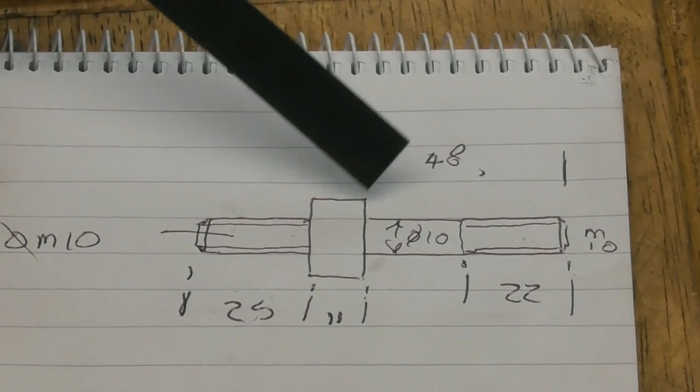As I mentioned at the end of part 2, the next procedure is going to be to make up the spindle that holds the tool post down onto the riser block. I'll show you a little drawing of that and we'll go from there. So yeah, unusually I've done a little sketch. It's basically M10 on either side with a boss in the middle.

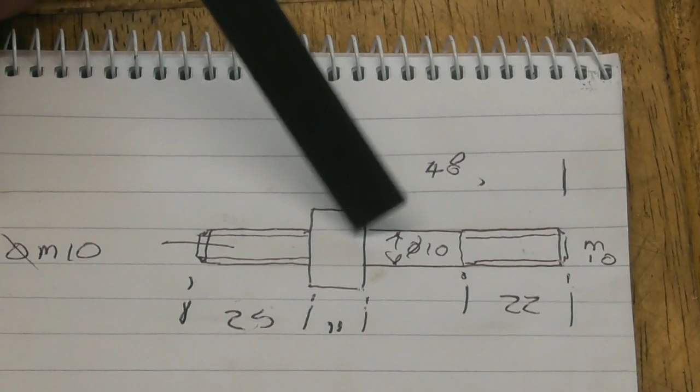So we've got 25mm of M10, a boss here which is just around the 18mm mark. We'll come to measure that up with the mic, which is 11mm thick, and then a 48mm long portion of M10 again, and the thread only needs to come down about 22mm. I'll probably just buzz through showing the highlights of machining that, and we'll go from there.

At the end of the last video I was shown tapping a hole in the riser block, and my vise was loose, but as you can see I've tightened up the 2 bolts that hold the vise on the bench. I was slapped on the wrist for it, and quite rightly so, and now my vise is tight.

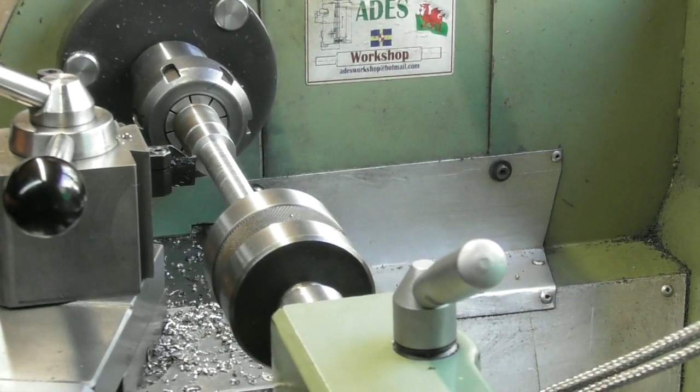Now I don't want to turn it down over its entire length, so what I'll do is just touch my parting tool on the edge of that face, which I've just done a skim on, by the way. Set to 0, and the overall length of this side is going to be 48mm. So I'll just set to 48. Let's just lock that into position. There we are, 48mm.

Lock my carriage, and I'm going to put a groove. Let me just check, you can see where I am. I'm going to put a groove in here. Well, I know there's 1.5mm to come off here. If I do a groove a mil deep, then I know I'm going to be undersized. I will be parting this off. I've got a couple of mil deep there.

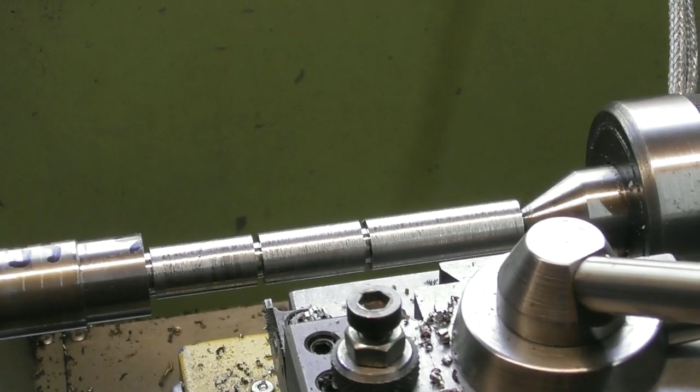So I've just put a couple of grooves in with a parting tool. I set the parting tool up against this face, came out 48 and put a deep groove in there, and that's the overall length of the M10 with the plain diameter - the M10 threaded bit is here, and the 10mm plain diameter is there. And I put a secondary groove in, which is to the root of the M10 thread, to that depth.

So now I'm just going to skim across the top of these 2 journals, should we call them, until I've got a 10mm diameter. Then I'll probably part this end off completely, and I will run the die up to put an M10 thread on the end.

Then I can hold it in a 10mm collet, and I can turn the other end, all based on a nice large diameter in the 10mm collet, or a large length of that diameter of 10mm.

I think my tip is a little blunt. The finish is okay, I'm just going to skim this down. I'm taking a mil off now. It leaves 0.5 mil, and I'm going to change to my finer tips. So I'll just skim this off, maybe a bit faster on the speed.

That's better. I've got a bit of deflection in this shaft, hence why I'm going to change over to my aluminium type tips.

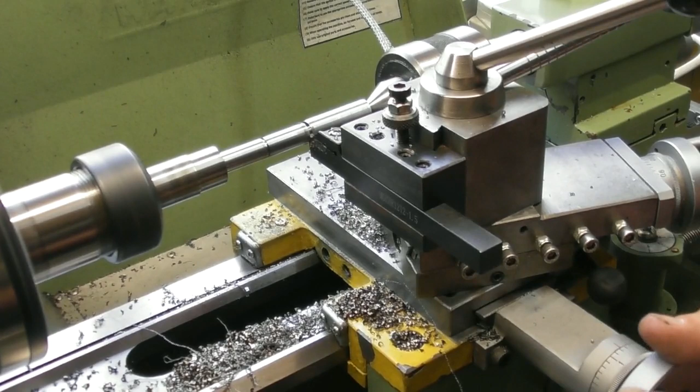So 10mm diameter done. I'm just going to part this end off. I'm not going to go all the way through. I can go a touch more, I believe.

Don't want to part this right off, because as you can see I've got a centre in. I don't like parting things off with a centre in them. But...

There we go. Just snapped off the little pip in the centre. That was as brave as I wanted to get. So I just remove that pip.

So I've got no support on the end now, but I should be able to just, there we go, remove the pip. I think at this point I'm going to put a centre drilled hole in the end, not too big, just a small one, so that I can pick that back up should I need to.

That will do the job. I think we'll have a nice chamfer on the end of there. I'll swap over to... there we go, to one of these.

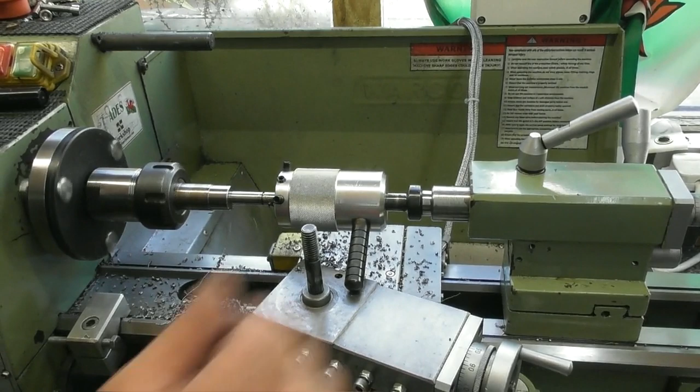I'm having to use a spanner instead of my drawbar. Not instead of my drawbar, instead of my winding handle. Purely because there's a drawbar in the headstock, and I can't put my winding handle in while the drawbar's there.

I push my emergency stop because with a spanner on the end of the head, if I were to start it up and not take the spanner off, well, you can imagine, flying spanners. Big dent in the forehead. So yes, I've got into the habit whenever I've got a spanner or the winding handle.

We're nearly there now. I need about another one turn to get into that groove.

And I believe that's it. So that's it. Take the spanner off. That's a 10mm thread with a 10mm diameter here, which fits snugly in the tool post.

I'll try the tool post on there in a moment. And I can now hold it by that 10mm, turn it round, and machine the other end.

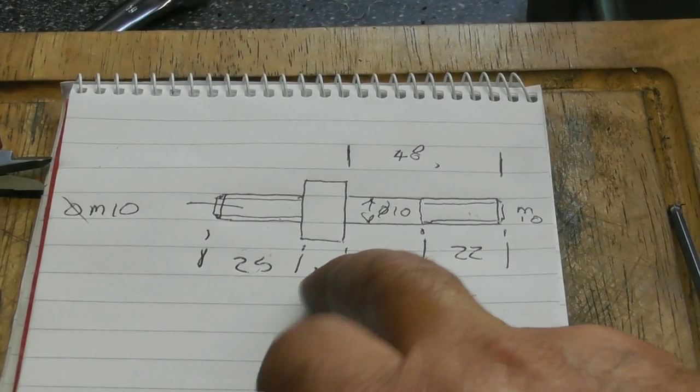So I'm just referring back to my drawing, 25mm, 36. So I'm going to part it off from that front face. So I've machined all this lot here. I'm going to part it off 36.5mm.

I can just get in there with my parting tool to take it off this larger diameter. I'm going to part it off, and I know that it's 0.5 millimeter to take off the end. Right. Oh well.

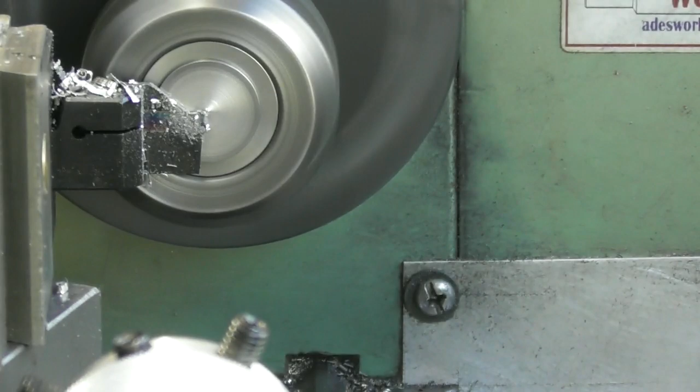Off it comes. So yeah, I finished off the diameter. Let me just have a double check of that.

Well, that's 10mm on the button. I don't know how well that picks up. Yeah, that's 10mm. Undercut it in there with a parting tool. Finish facing this face here, and put a chamfer on the end as a lead-in for the die.

So the next step in the procedure, much the same as last time, is to run the die down there, much the same as you saw me do last time.

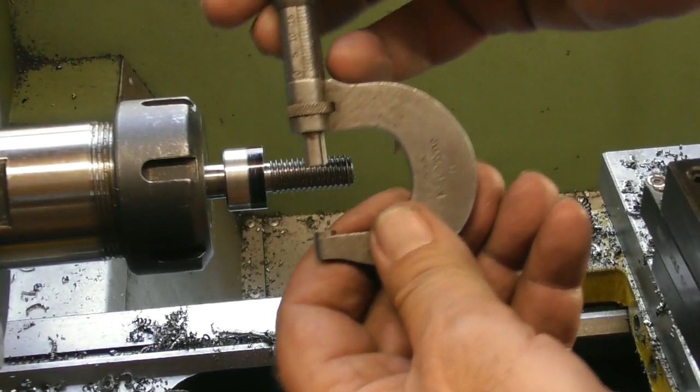So this part fits in my riser block, and the hole I bored in the riser block earlier, I've just checked it, it measures up at 18.1 millimeters. So to give myself a fighting chance, that black area is like a hundredth under 18.1. Now I've screwed the riser block on there, and it does just fit in here. In fact, it will remove the black marker if I do it.

Now I've measured the underside of the tool post, and that measures 17.95 - sorry, I didn't say - and that is a couple of hundredths under, because it has to come on and off occasionally. So a couple of hundredths under where it fits in the tool post, and like a hundredth, maybe 2 hundredths under where it fits in the riser block.

So I'm going to put a chamfer on there now, on this leading edge, to make it easy to get in the riser block. And I'm just going to get in with a cutter and put a larger chamfer on this back edge, to allow the lead-in for the tool post on the riser block. So I'll get on and do that.

So in fact I can probably do that in shot. One clip. Oh, I got my tripod very close here. In fact, yeah, I think that'll about do me.

Let's just put a little chamfer on there. I'm just going to angle my tool post round a bit. I'm working around the camera here. I think I can just get in there. I can. And a larger one here. And that will do me.

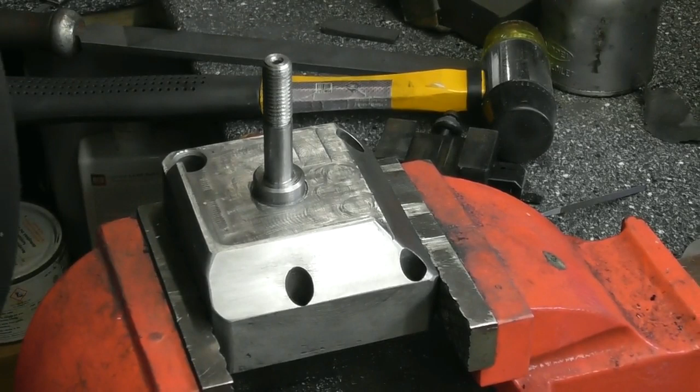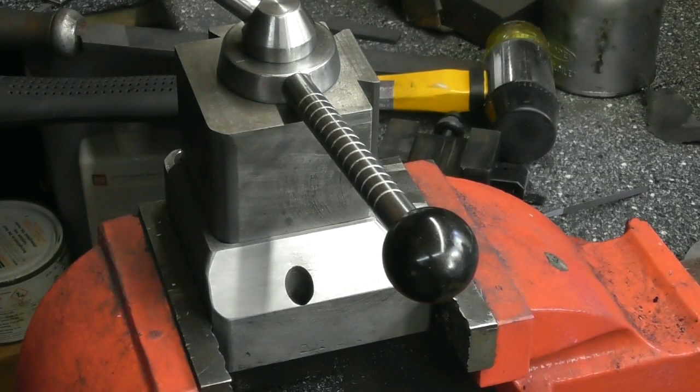Let's just try the handle in there. Now this is in the orientation it would be on the lathe, so the carriage runs in this direction. I'm about 90 degrees out with the handle. Now I can't bring it back there, but what I can do is bring it round another 3/4 of a turn, which is 3/4 of the pitch of the thread.

So the pitch being 1.5, 75% of 1.5 is 1.125. So of the underside of this register, if I remove 1.125 millimeters, that should allow the handle, or this thread will revolve, and the handle should come around further to lock it off in this position here, as opposed to this position here. So we'll do that next.

Okay, with the bed running in this direction, the handle now stops there and it's going to be out of the way of the tailstock, everything else. Yeah, I brought it back 90 degrees from where it was by taking 1.125 off the underside of the bolt, screw the bolt in a bit more, job's good.

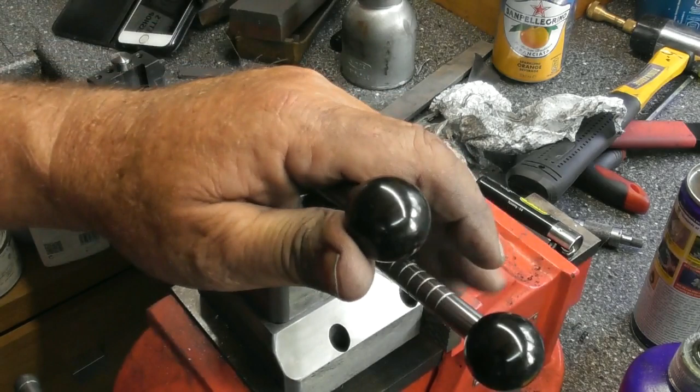So, one final job I want to do is that on the underside here, this spot is not where the little dowel is that's on the swivel plate of the, when you fit the compound slide.

Let me just show you. Yes, so I want to have a little hole, as you can see it's not in the right place. A little hole in the underside, which means I haven't got to take this plate off, or plate out every time.

I want to change between this and back to the compound slide. So I just want a little hole in the underside just to clear that. It doesn't have to be very large, just to clear it, so that when I change to the compound slide from the fixed block for whatever reason, I haven't got to take the cross slide off and refit this plate.

So yeah, that's the plan - get a hole in the underside of this. Quite simply, I've measured from the outside to the far side of that dowel, reduced 3mm, scribed the line, and then again measured from the outside here to the center, to the far side of the dowel, reduced it by 3mm, and scribed the line again. And I've now got - I don't know if you can see it, yes you probably can - a little center pop there, and I'm going to drill it with probably a 7mm hole.

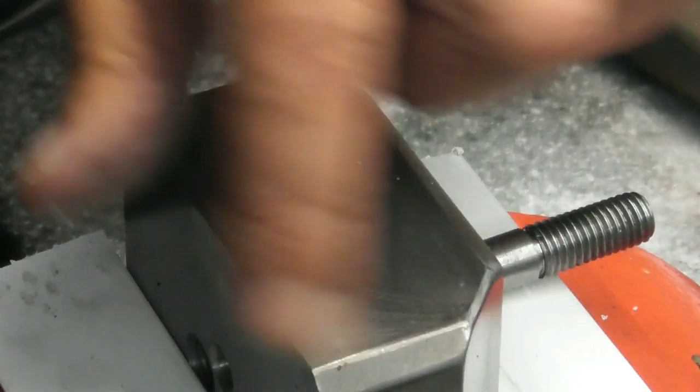So I said I was going to polish up the faces and what have you to make everything look nice, and I have been asked before how I go about doing that. Well, I've got a good sharp file here. It's not a coarse file, it's like a medium grade file.

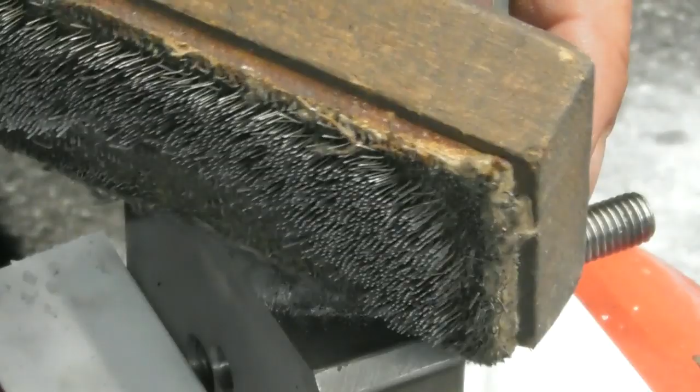I've just cleaned it out with a file card, and as you can see, my file card - well I've probably got more here than the file card's got bristles. Anyway, that's another story, but it goes to show it's been well used. So yeah, I didn't explain myself - nice clean file, cleaned out with a file card, and then I used some French chalk. It just helps stop the file clogging up, or the clog filing up, as I nearly said.

So if I've got a surface like this, it's got the machining swirls in it still from where I've milled it off. So yeah, I'll take a file, and with a surface like this, I'll actually draw file it.

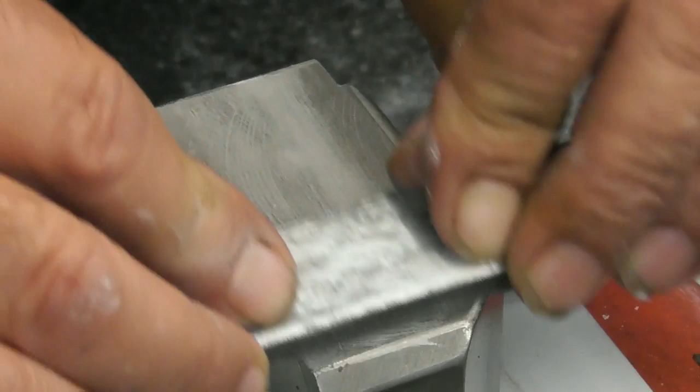So I'll use a file at 90 degrees to what you would expect, and I'm holding it flat on the surface, flat and level, and I'll draw file it without applying a great deal of pressure across the surface. Now I just give it a tap, and that removed any of the material that's built up in the file, and I'll keep going with that until I get to a point where the machining marks have gone.

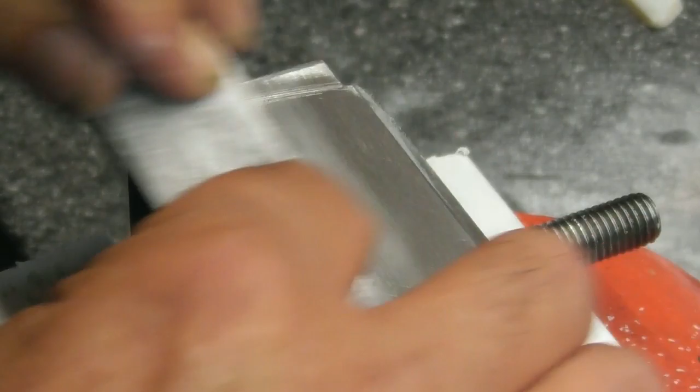Now I can also do it this way as well occasionally, just to make sure I'm not taking the ends off, and sometimes I'll use the file on a diagonal as well. And again, on the same note, I'll rotate my block, so that if I'm putting more pressure on one end than another, I'm evening myself out, but not really pushing on the file. I'm just letting the file itself do the work while keeping it flat to the surface.

So again, I will do a diagonal, and again a diagonal that way.

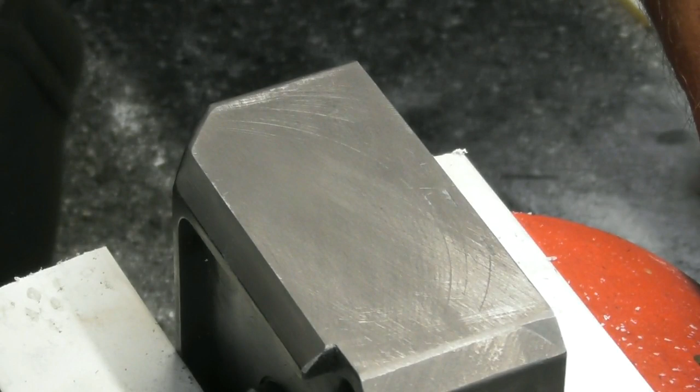It takes me back to when I was an apprentice - part of the training, I suppose, when you were in your first year, was learning how to file. They cut us off a piece of inch and a quarter square mild steel, chopped off on a bandsaw at inch and a quarter long, so I had basically an inch and a quarter cube. And the exercise was to file the cube on all 6 faces, and it had to be square within a thousandth of an inch, and within a thousandth of an inch cube. So you had a quarter of an inch to come off on each dimension, and you had to keep everything square and to size within a thousandth of an inch.

Now you can imagine, after about 4 or 5 pieces of metal later, having them thrown in the bin by the apprentice supervisor, you soon learn to be able to file things flat and square. So yeah, that was the exercise. There's no substitute for practice with filing - everybody's got their own techniques, and as I say, no substitute for practice. The more you do it, the better at it you get.

Don't tend to have to do a lot of filing in industry nowadays, because the machines are a lot better - it's an expensive way of getting something flat. If I had a milling machine or surface grinder, it would be a lot better than doing it on the lathe. But sometimes you've got to resort to the old-fashioned way, and draw filing's quite a good technique.

So I'll keep going on this now until I've basically removed all the machining marks. Still going, getting somewhere near now. I do have a couple of marks from the four jaw chuck here, which I'd have to reduce it by about 0.5 millimeters to get rid of, but I'm just concentrating on getting a flat surface. So I've been draw filing it this way, keeping the file contact flat at all times.

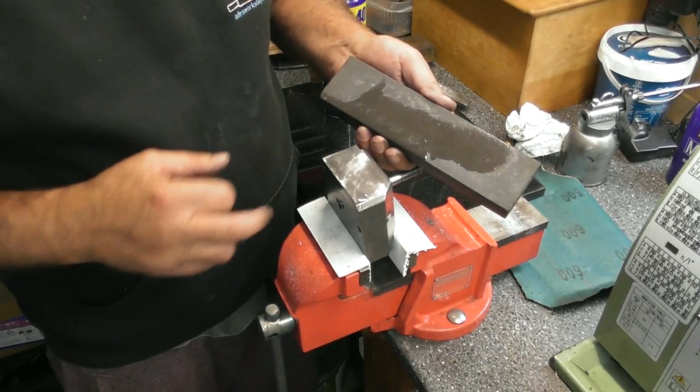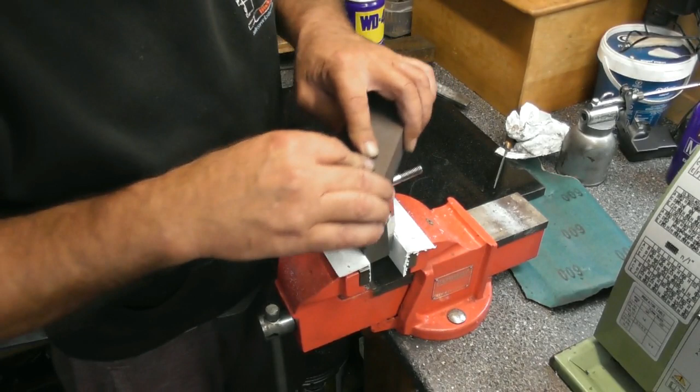So once I've filed it flat, I take a large flat oil stone. I've sprayed both sides, and I generally use WD-40 for this. I'll gently rub it over the top with the coarse side. May take 3 or 4 minutes, but I'll keep going until I can't see any more file marks - all I'll see is the swirl marks from the stone.

So as you can see, it's coming up, starting to shine now. I'm keeping the oil stone flat and in contact with the whole area. Ideally figures of 8, but I'm just sort of doing a bit of a random orbit.

And eventually all the file marks will disappear from this surface. As you can see, it's coming up reasonably shiny now, and I'm starting to see swirl marks. I can still see some witness marks from the file here and there, so I'll keep going with this, probably another 5 or 10 minutes.

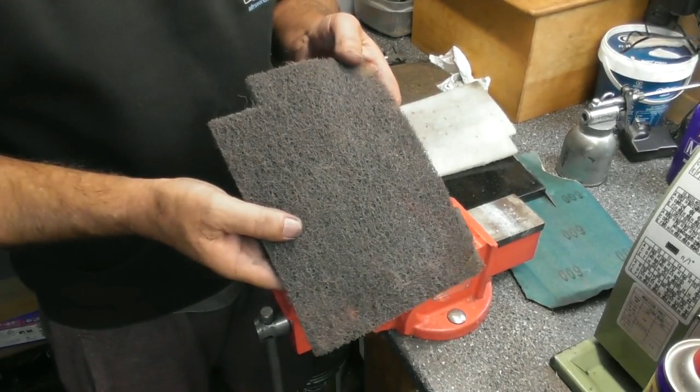So final couple of steps now. I've got some coarse - well, it depends on the manufacturer, but this is coarse Scotch-Brite. I'm just going to buff over the surface with that until I've got a regular surface. It's almost like a brushed finish now.

Those little dinks in here are really getting on my nerves where I held it in the vice jaw. I really should have put some soft jaws in when I did that. I thought with it being cast we might get away with it, but anyway.

So that's that. And then I've got a medium Scotch-Brite, which is a brown one in my case. So I'll do the same thing again, just refine over the surface of that with the medium.

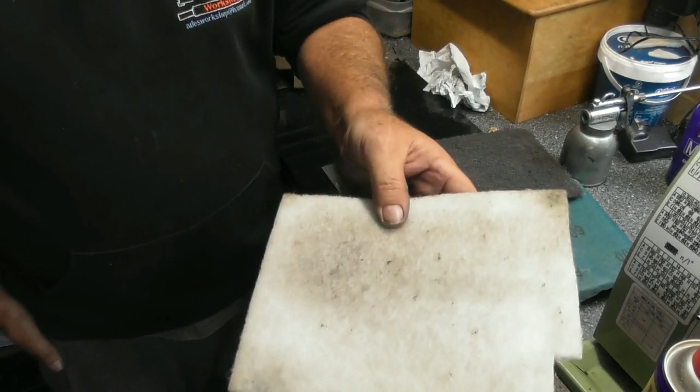That's good. And I can finish off with a fine one, and this will basically just buff it. I'm going to mark there - there's an oily fingerprint, something like that. There we go.

Well, I don't know how well that shows up, but I've got a polished surface there now.

So I just need to do it on the rest of the block, I suppose. Well, there it is, the finished job. I've just given it a bit of a try - did a facing cut, parted a piece off, just put a big chamfer on with another tool. I've got a bit of polishing up to do, and pretty much the job's a success.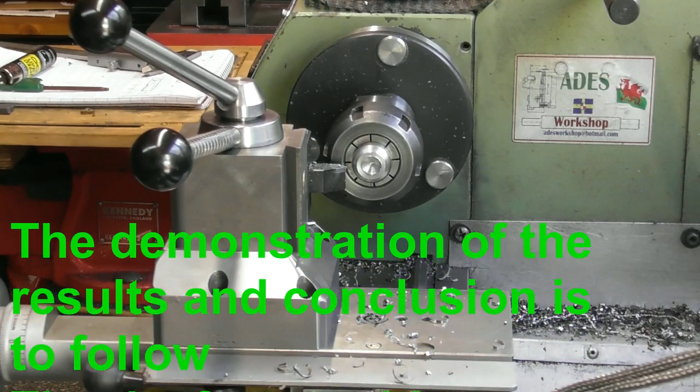Yeah, I'm pleased with how it's turned out. Everything's locked solid. Time will tell - we'll have to see how we get on as we're machining. So it's a case of time will tell, really, but all in all, I'm pleased with the end result.